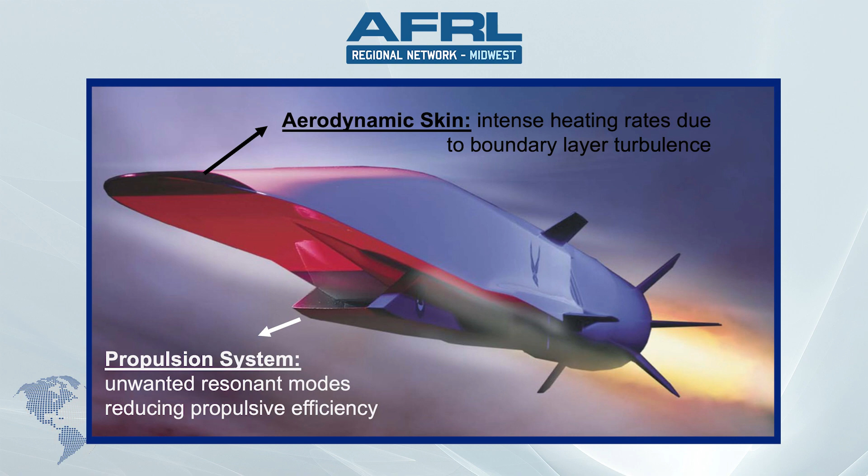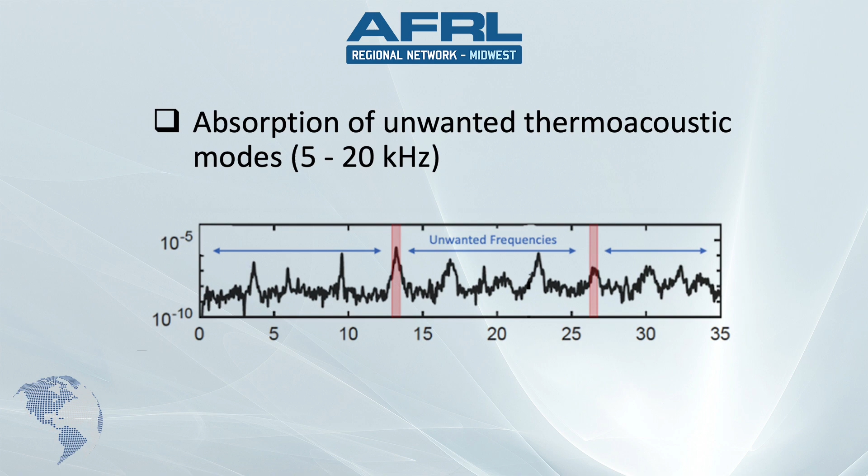The philosophy of what we do at HySonic focuses on wave control. The company has been involved in external flow control, controlling waves that naturally occur on the external shell of a hypersonic vehicle. These waves are typically in the range of 100,000 hertz to a megahertz, so very high frequency waves. But we've also been applying the same philosophy, same tools, same skill set to internal flow control, specifically in the propulsion system of hypersonic vehicles.

The AFRL Regional Hub is interested in advancing the TRL level of our technology as it pertains to external flow control. To do that, in the first 6 months of funding, the first part of our effort will be extending the ultrasonic benchtop testing capabilities that Carl Jantze developed.

Hello, I'm Carl Jantze. I'm the PI for this AFRL Hub Award. Here we have our vacuum chamber at HySonic Technologies. This is the same vacuum chamber we use to evaluate the absorption characteristics of different material samples that are used to be flow control samples.

By subjecting the sample in the vacuum chamber, we can control the pressure in the environment. We can also control the gas that we're using. In this case, we're using ultra-dry air. This allows us to simulate different altitudes and different acoustic characteristics that would occur at those altitudes.

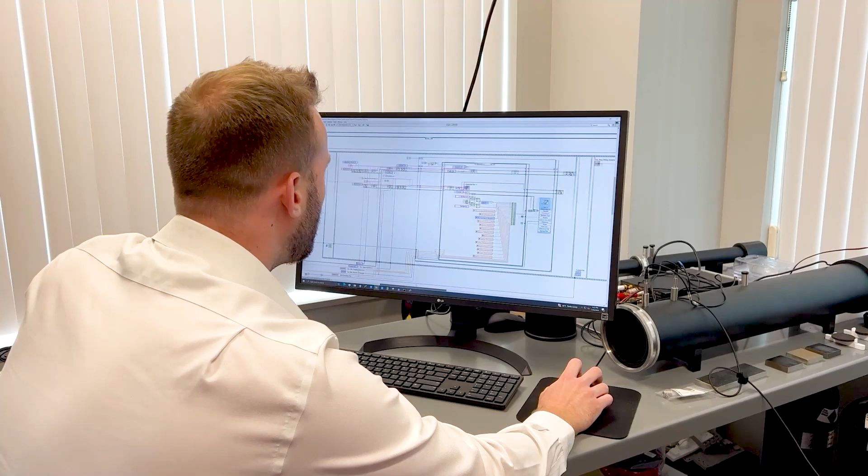By placing the sample in the vacuum chamber in a certain setup and angling 2 ultrasonic probes, we can subject the sample to ultrasonic waveforms. Then we can extract the data in post-processing and evaluate what its absorption characteristics are. This allows us to evaluate what materials would be best for absorbing the acoustic energy that generates early laminar to turbulent transition for hypersonic flow.

Once Carl is done improving the benchtop testing capabilities and helping us pick what material is best suited for wind tunnel testing, we ship that material to the Air Force research labs. In the first part of the effort, they will test it on our old testing platform called the Boat, which is a small flat plate testing apparatus.

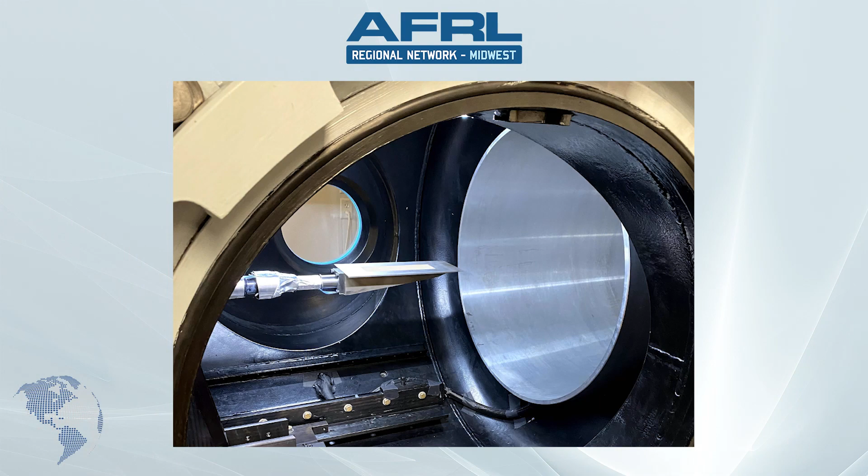Under AFRL Hub regional funding, we were able to design a new model, roughly this much bigger, with more real estate, allowing us to investigate things beyond just aerodynamic flow control, significantly increase the TRL level of our technology, and also strengthen the partnership with the Air Force research labs, who are very interested and excited about this technology, which has already been proven successful.

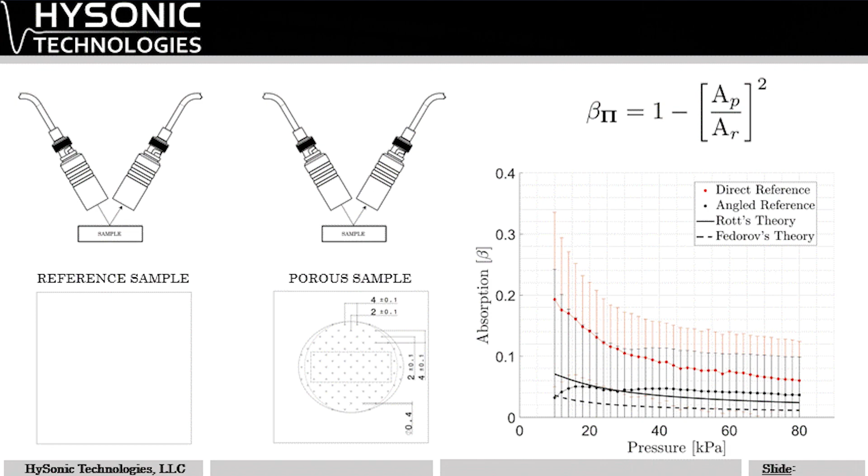In terms of results, you'll see a plot of the acoustic absorption coefficient for this material sample against pressure, between pressures of 10,000 Pascal to 80,000 Pascal. You'll notice, based on the red dots, that its performance is declining as we approach higher and higher pressures. This means that this material sample in particular will perform better at a higher altitude.

The formula that you see here, beta, is the acoustic absorption coefficient. It's marked out by 1 minus the ratio of the porous amplitude in comparison to the reference amplitude, squared. So when we take these tests, we measure our porous sample, we measure a reference, and we compare those amplitudes together at each individual pressure we're interested in. This allows us to get that curve in the pressure domain.

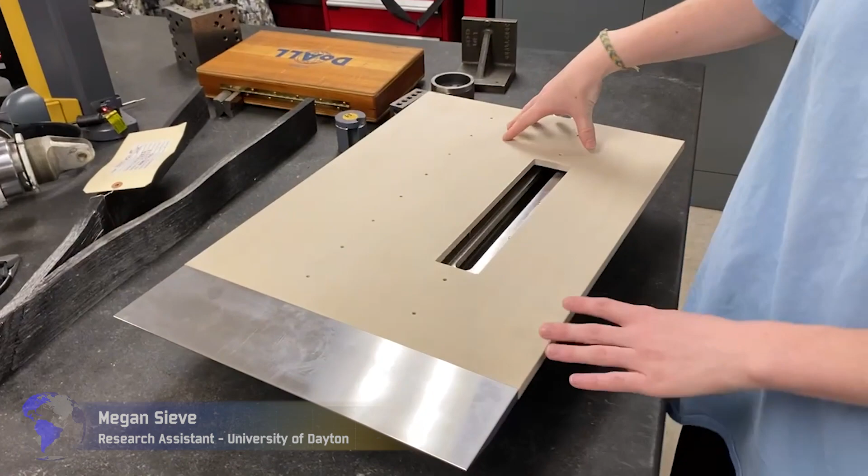Okay, so this is the model that we've been testing in the wind tunnel. We've got a steel leading edge out front, and then this material is made out of a PEEK material, which is good with our IR camera. All of these holes are for different PCB pressure sensors, and then this cavity right here is where we would put the porous insert.

You can see there are the PCB holes on this side as well, and there are matching PCB holes in that insert. We'd like to have it this way, with the insert right next to this PEEK non-porous area, so we can do a side-by-side comparison between what the boundary layer is doing with the PEEK material versus with that porous insert.

I'm Dr. Running, an assistant professor here at the University of Dayton. For this project I've been helping, along with Megan, lead the design of the model, the testing at Wright-Patterson Air Force Base in their Mach 6 Ludwieg tube, and then post-processing, analyzing the data, and planning for future tests.

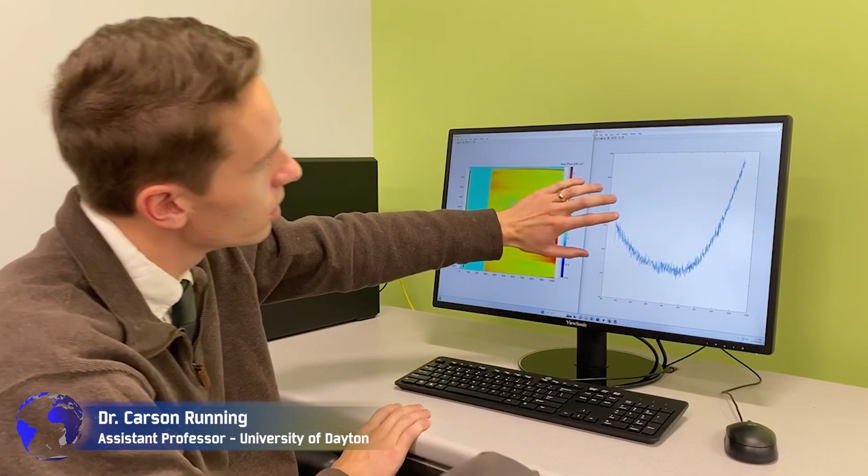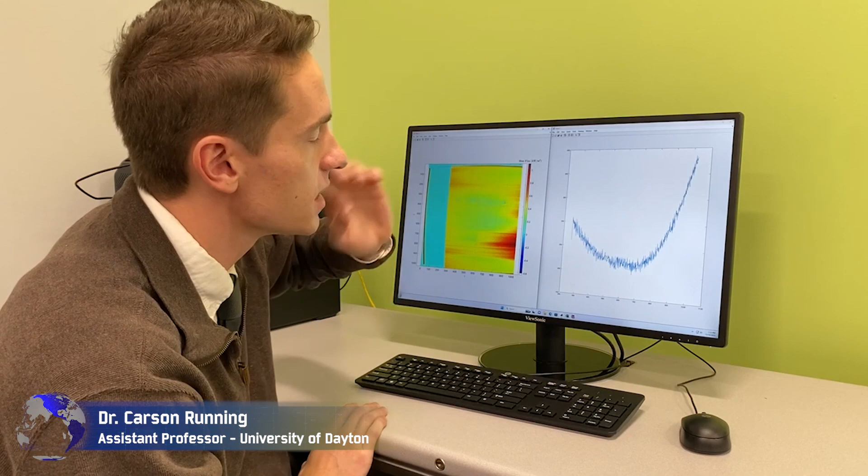This data was taken from above during a wind tunnel test with an infrared camera. If we take a profile along a particular ray along this large wind tunnel model, we get more quantitative data, and we see a reduction in heating as we move downstream, then an abrupt increase in heating. This abrupt increase is indicative of the initiation, or start, of transition of our boundary layer state from laminar to turbulent. This is what we're trying to measure, and this boundary layer transition is what we're trying to control passively with our novel porous materials.

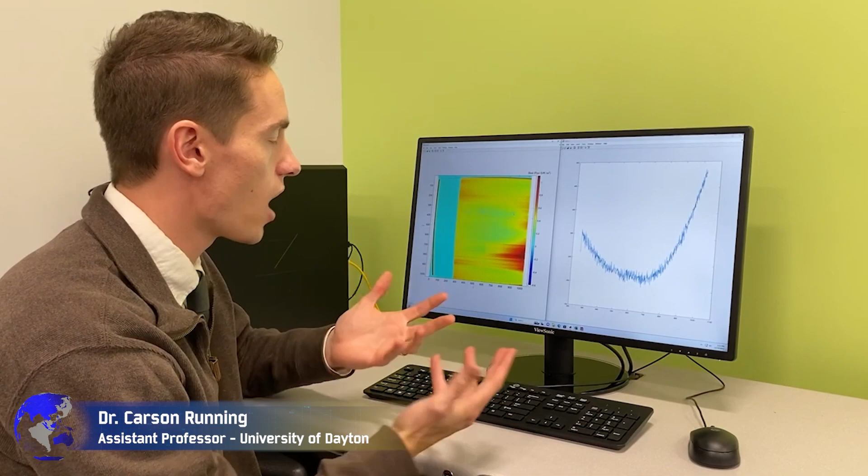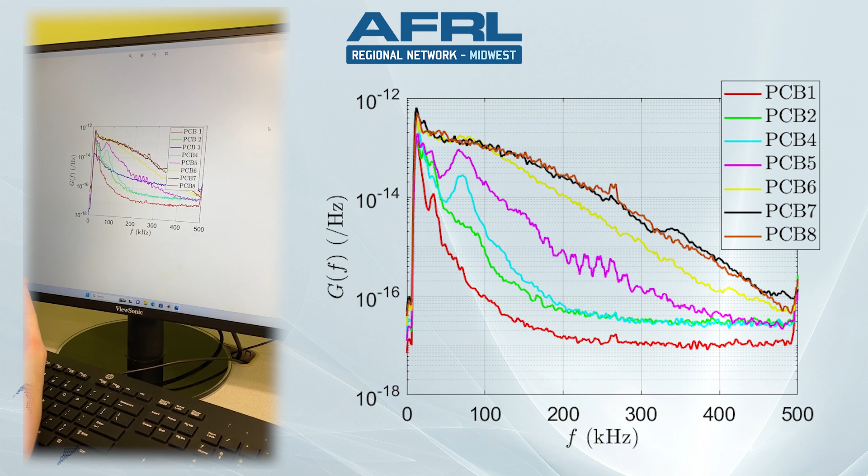In this first 6 months of work, we've achieved two very important milestones. Milestone number one is improved benchtop testing capabilities. This is a testing apparatus that Carl developed back in 2019 under ONR Phase 1 funding. Under regional AFRL funding, he had the opportunity to extend the pressure range for ultrasonic testing, and the ultrasonic frequency range at which he can assess material properties. So that was milestone number one.

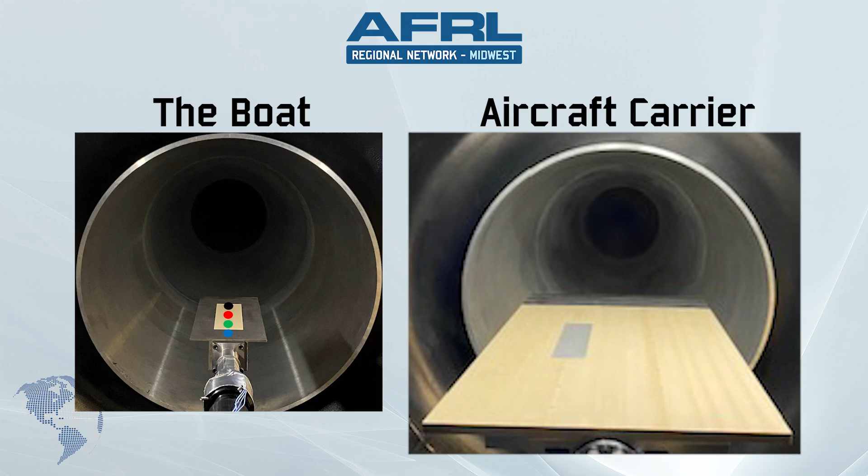Milestone number two is we've designed a brand new wind tunnel test article called the Aircraft Carrier. It's a big article, a lot of real estate to do a lot of different testing. We've successfully gone through one wind tunnel test entry where we provided proof of concept that we can design this test article to achieve hypersonic transition at different locations, at different distances from the leading edge. Moving into the incremental phase of funding for the following 6 months, we look forward to testing different materials with different recipes that achieve different types of surface porosity, covering a wide range of parameter space in terms of material design and aerodynamic conditions. This will allow us to inform control strategies for hypersonic vehicles at various altitudes, hence different Reynolds numbers, and achieve the overarching goal of this effort, which is to reduce hypersonic boundary layer drag.